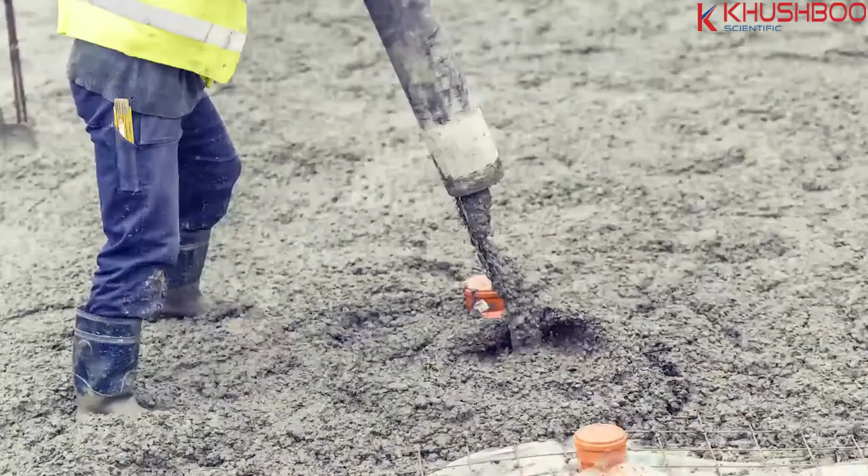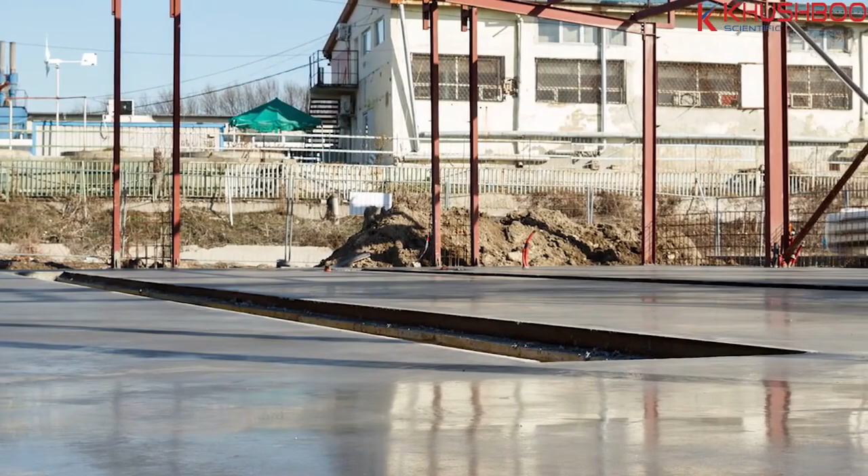When mixing concrete, water must be added to create a workable mix and to allow the cement to hydrate and cure. After hardening, much of this water remains as moisture within the porous concrete slab. Over the following months, this moisture is slowly emitted from the concrete until it eventually equalizes with the surrounding moisture levels. When applying flooring materials or coatings to concrete, it is critical to ensure that the moisture level inside the concrete has decreased to acceptable levels. If not, moisture can accumulate below the flooring or coating, causing discoloration, cupping, buckling, blistering, adhesive failure, and mold growth.

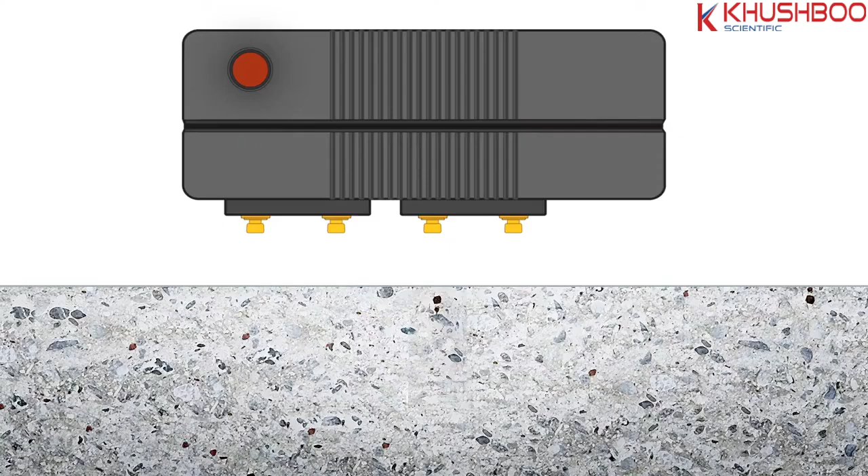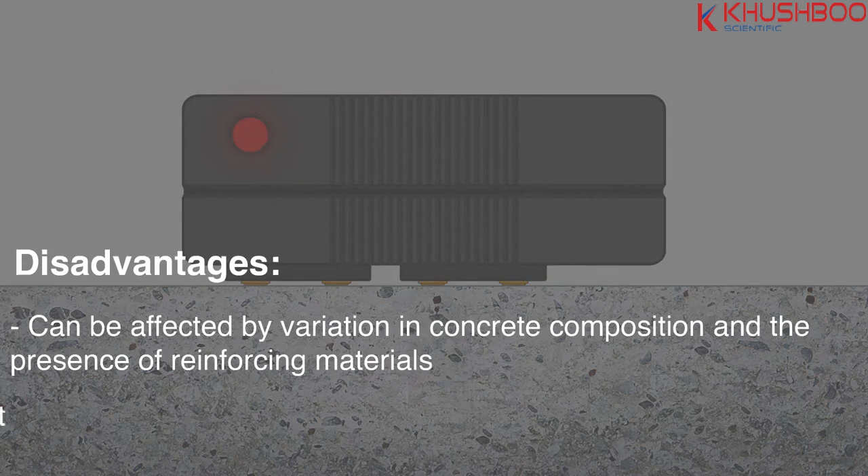There are several methods for measuring concrete moisture. Of these, the three most popular are non-destructive electronic meters, anhydrous calcium chloride, and in situ relative humidity probes. Non-destructive electronic meters measure the electrical impedance of the concrete, which is related to moisture levels. However, these meters can be affected by other factors such as variations in concrete composition and the presence of reinforcing materials. ASTM recommends that these instruments be used as a comparator and not for determining quantitative moisture content.

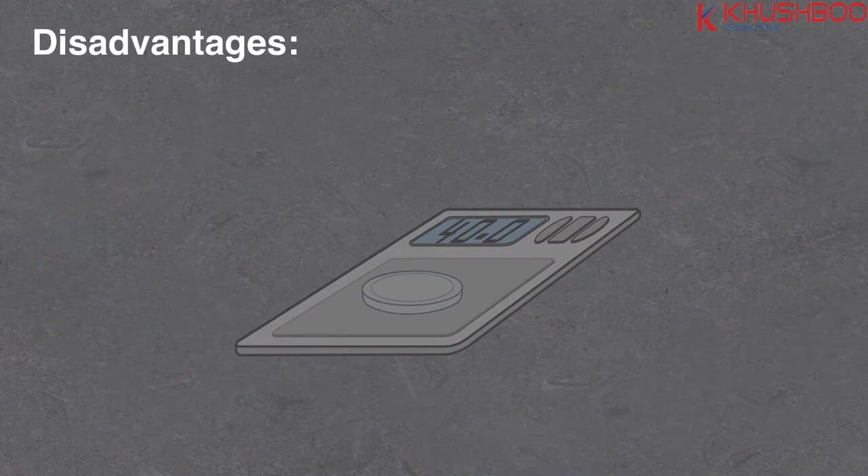The anhydrous calcium chloride test involves measuring the increase in weight of salt as it collects moisture from an encapsulated area of the concrete surface. However, significant doubts concerning the accuracy of this test have arisen. There is no practical way to calibrate these kits. They measure moisture only on the surface of the concrete, and they are heavily influenced by ambient conditions.

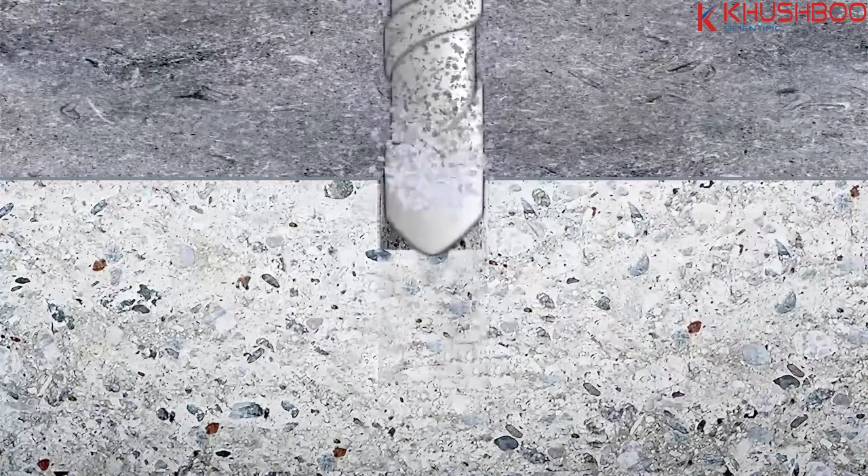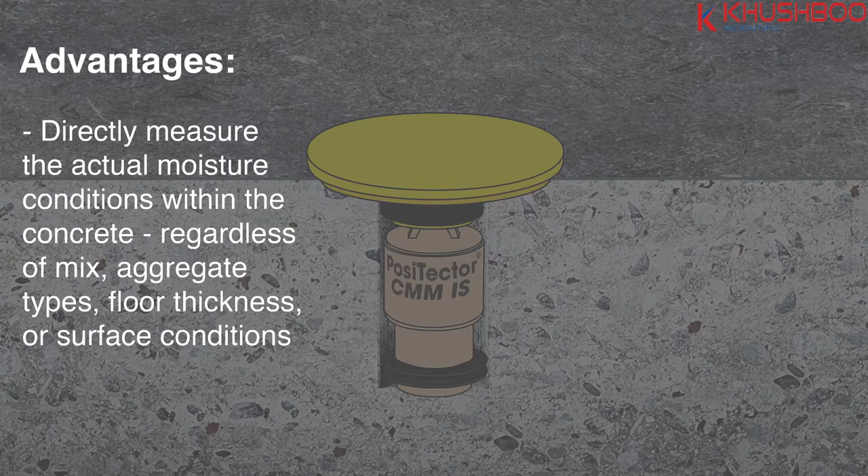The new industry standard for measuring concrete moisture is the in situ relative humidity test, as described in the ASTM F2170 test method. It involves drilling a hole into the concrete and using an electronic relative humidity probe to measure the moisture directly in the slab. The in situ test has a number of advantages over other methods. Most importantly, in situ probes directly measure the actual moisture conditions within the concrete, regardless of mix, aggregate types, floor thickness, or surface conditions. Potential sources of error are minimized compared to other methods. In situ tests also tend to provide a significant savings in testing time and labor versus calcium chloride tests. Finally, in situ probes can be calibrated with traceability to national standards.

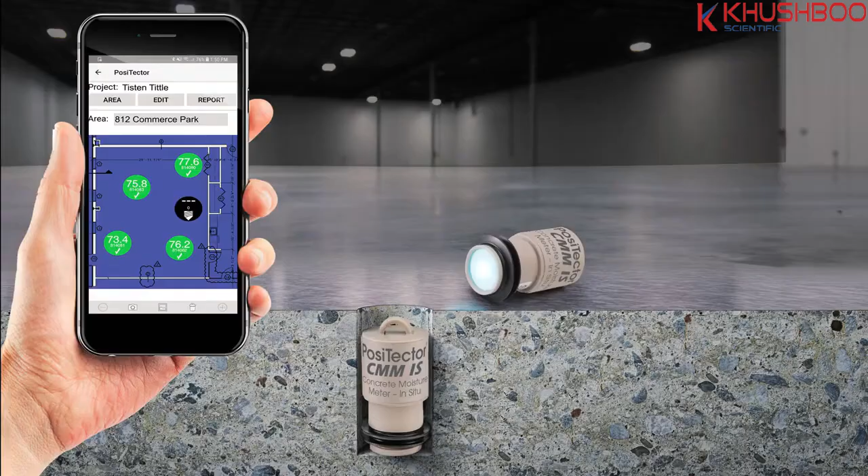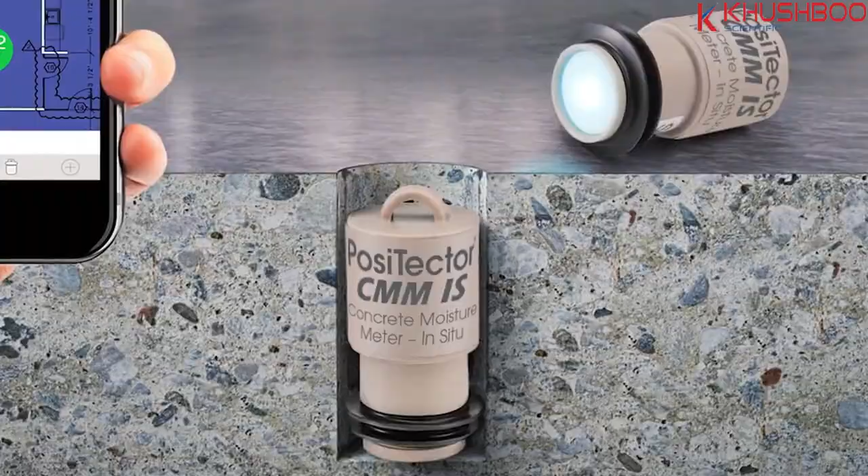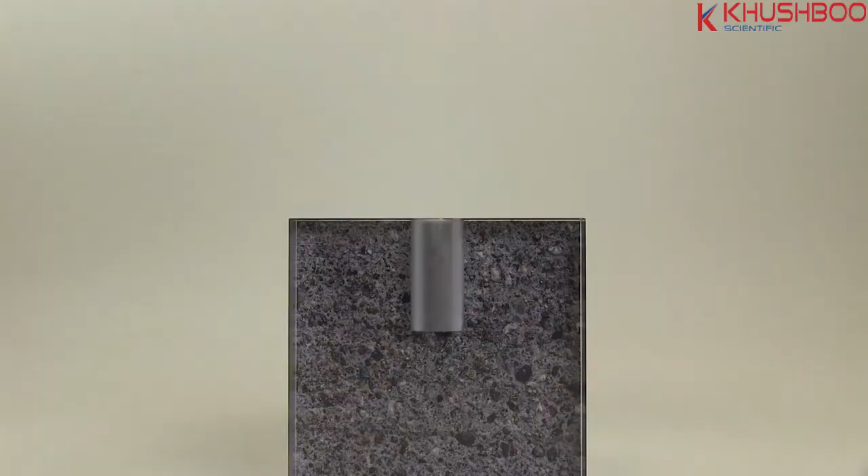The PosiTector CMM-IS in situ concrete moisture meter is the simple, durable, and accurate way to measure in accordance with ASTM F2170. Each probe includes a calibration check salt and chamber for storage, and to verify calibration accuracy before testing. Probes feature Bluetooth low-energy wireless technology to transmit moisture readings to a smartphone or PosiTector advanced gauge body. The probe runs for up to 3 weeks on a single coin cell battery and features an innovative design that doesn't require separate disposable sleeves or bases. A bright yellow cap seals the test area.

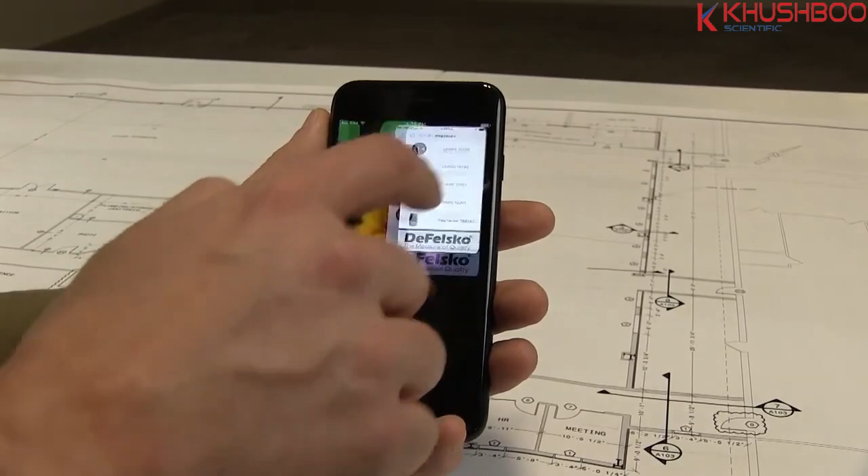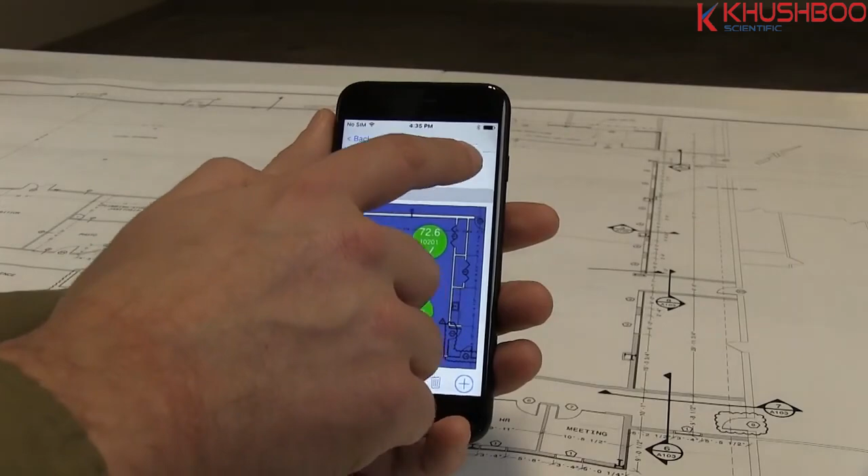The free PosiTector app makes capturing and reporting in accordance with F2170 easy. Using an iOS or Android smartphone, overlay each probe on a floor plan and add metadata and notes as required by ASTM F2170. When testing is complete, quickly print a professional PDF report that includes all data required by the standard. The PosiTector CMM-IS is available in 3 convenient kits.

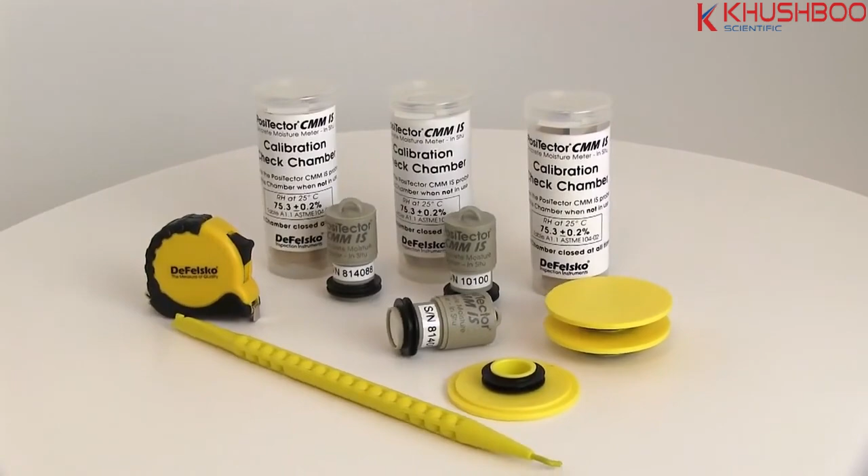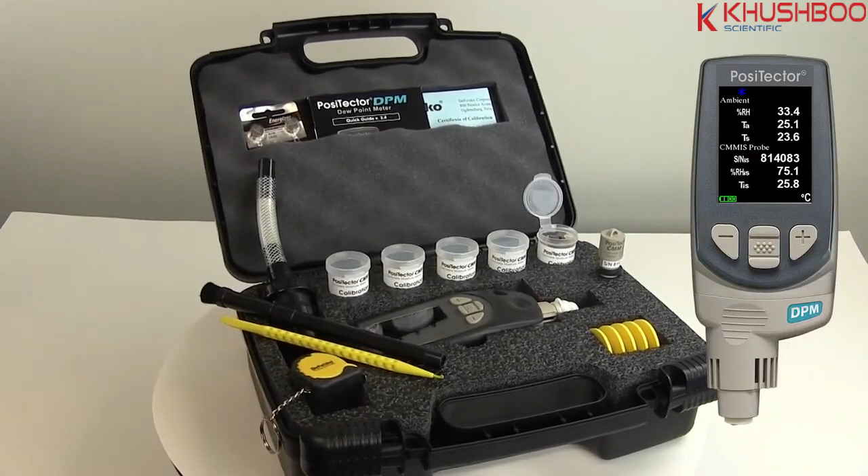The basic kit contains 3 probes, check salts, and a calibration chamber for measuring areas up to 1,000 square feet or 100 square meters. A measuring tape and extraction tool are also included. The complete kit contains everything from the basic kit, in addition to a vacuum tool for cleaning the hole after drilling, a hard shell carrying case, and 2 additional probes for measuring up to 3,000 square feet or 300 square meters. The Pro Kit contains everything from the complete kit, in addition to a PosiTector DPM advanced gauge for measuring ambient temperature and humidity. It can wirelessly receive in situ humidity and temperature measurements, displaying them alongside the ambient measurements.

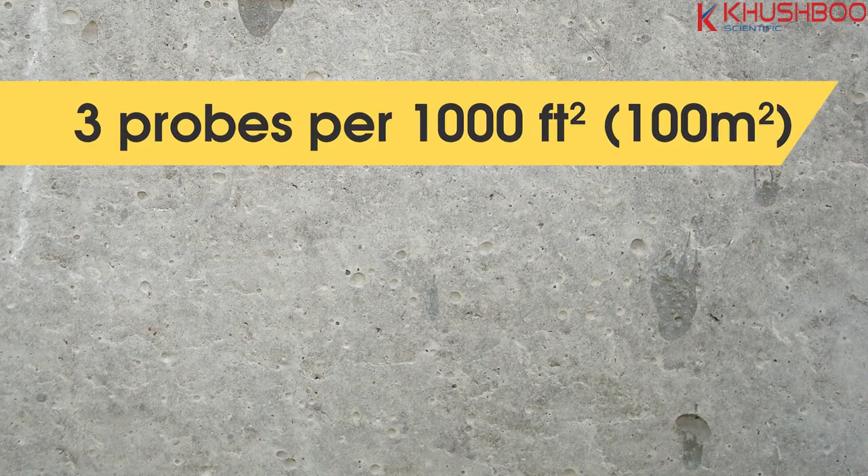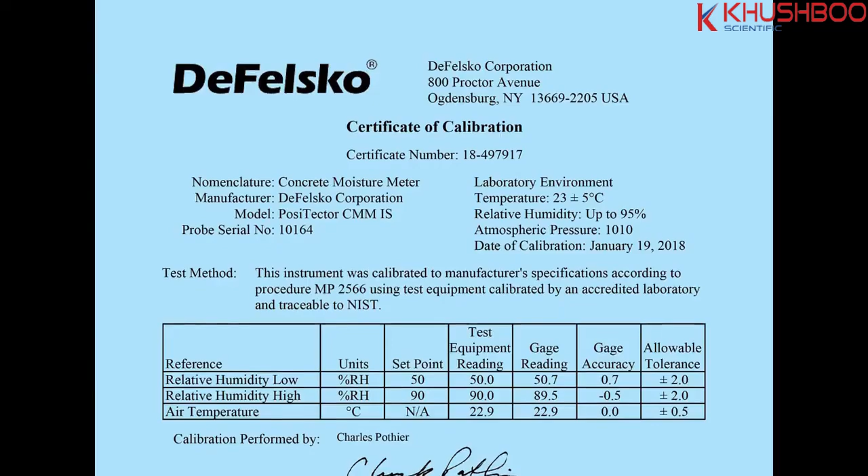The process of measuring concrete moisture in accordance with ASTM F2170 is simple with the PosiTector CMM-IS. The first step is to determine the number of probes required. ASTM requires 3 probes for the first 1,000 square feet and another probe for each additional 1,000 square feet. Mapping locations is easy with the PosiTector app. Take a photo of your floor plan and overlay probe locations. Ensure that the slab and the ambient air above it are at service conditions for a minimum of 48 hours before testing. The next step is to verify probe calibration.

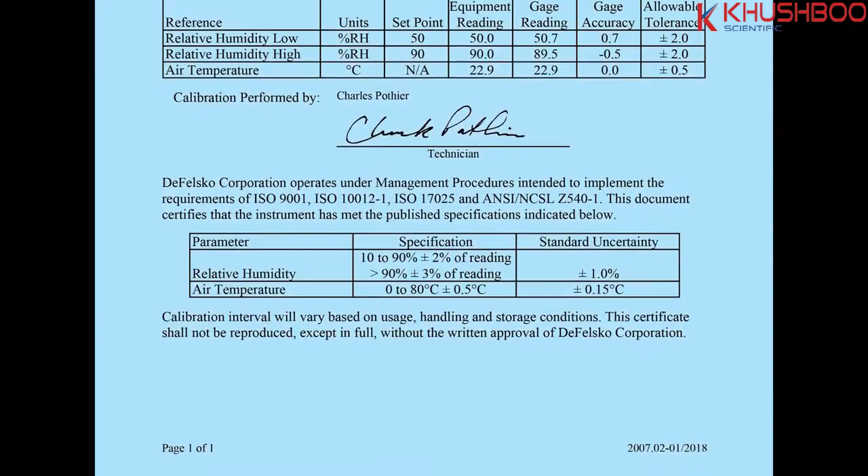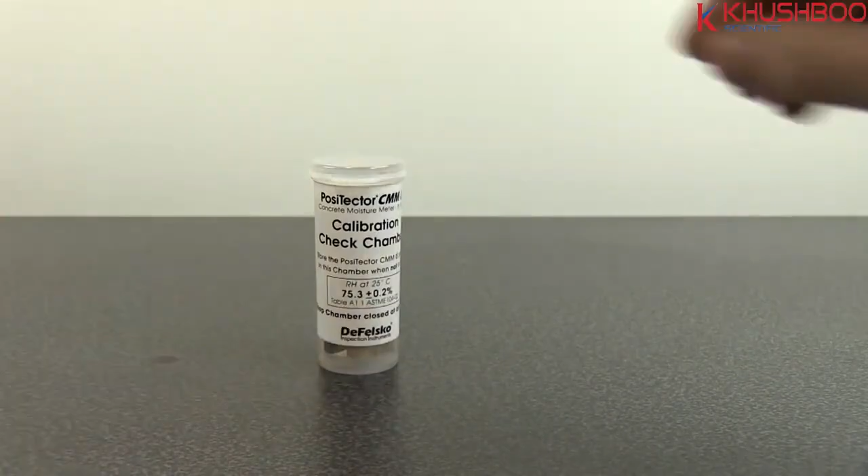PosiTector CMM-IS probes come complete with a long-form certificate of calibration traceable to NIST. F2170 requires that each probe be calibrated within 1 year of use. F2170 also requires calibration to be verified within 30 days of use with a saturated salt solution. Each PosiTector CMM-IS probe comes prepackaged with a saturated salt solution, so verifying calibration is as simple as turning on the probe by unscrewing the cap and inserting a battery, then ensuring that the current probe reading matches the label on the container. Next, drill the test holes.

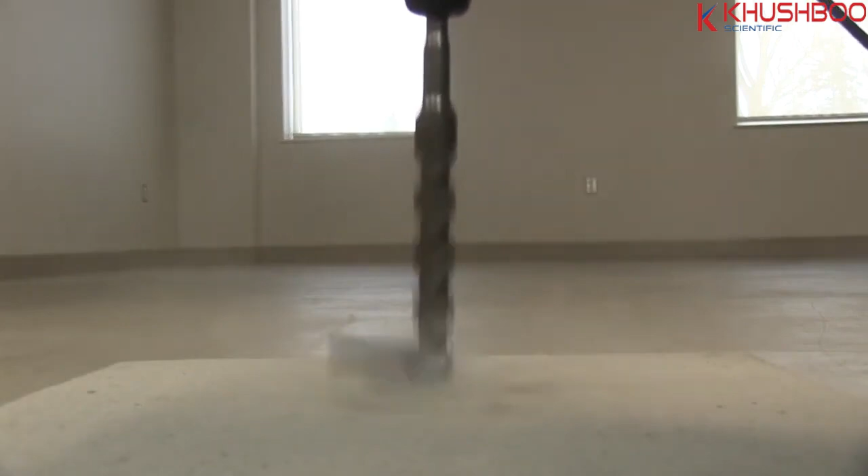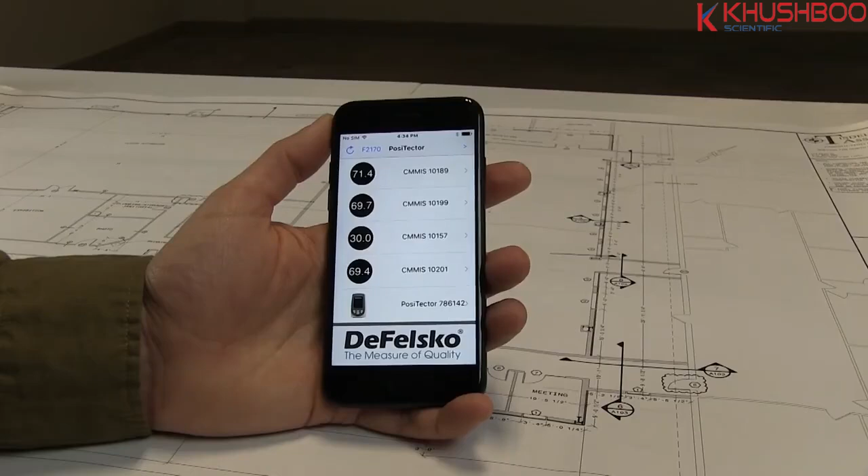Using a hammer drill and 3/4 inch drill bit, drill to the required depth, 40% of the slab thickness if it is drying from one side only, or 20% of the slab thickness if it is drying from two sides. Clean any debris from the hole and note the time the hole was drilled in the app. Finally, insert the probe into the hole and use the yellow cap to seal it. Note the time the probe was inserted using the app. The probe begins measuring immediately and readings can be displayed at any time using the PosiTector app or PosiTector Advanced instrument. However, F2170 requires waiting 24 hours for conditions in the hole to equilibrate before measurements are recorded.

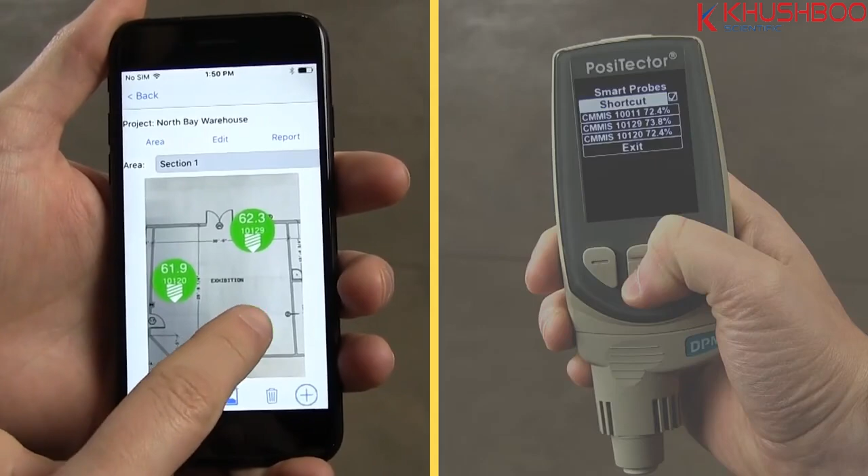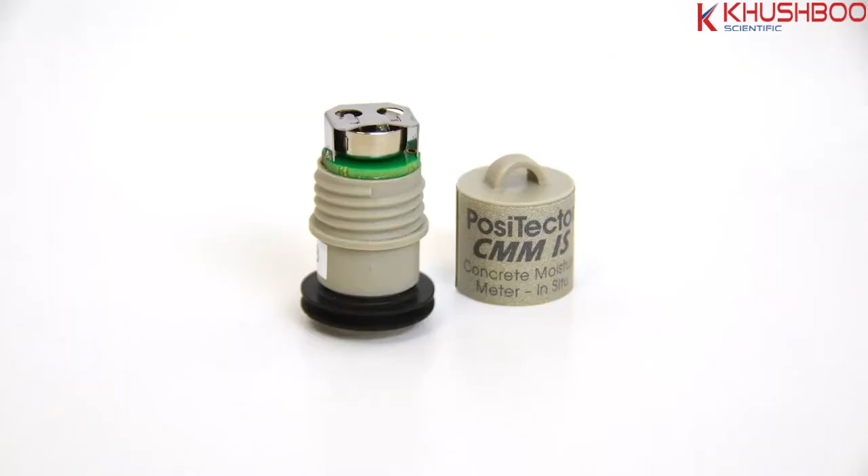After that time has elapsed, use the PosiTector Advanced gauge body or the PosiTector app to easily record the in situ temperature and humidity along with the time and date. If the results are outside of project specifications, the probe can be left inside the hole until the project specification is met. Probe batteries last up to 3 weeks. When testing is complete, simply remove the probe using the extraction tool and fill the hole with a suitable patching compound. ASTM F2170 also requires that the ambient temperature and humidity above the hole be measured. Place a probe above the hole and record conditions using the app.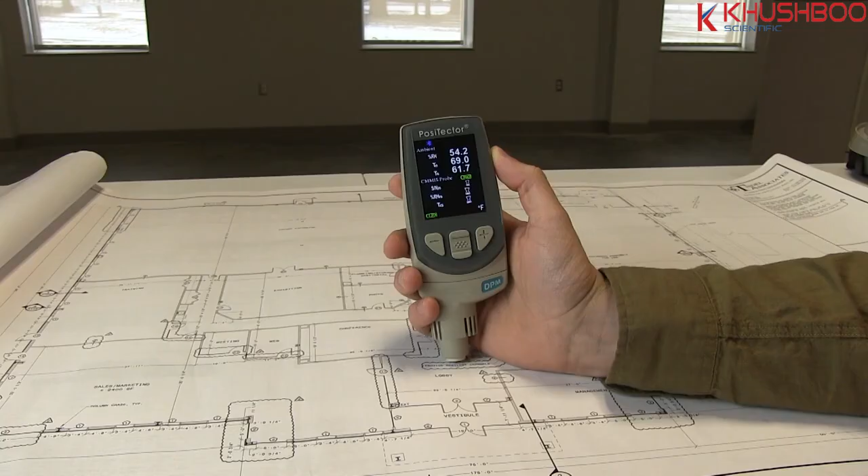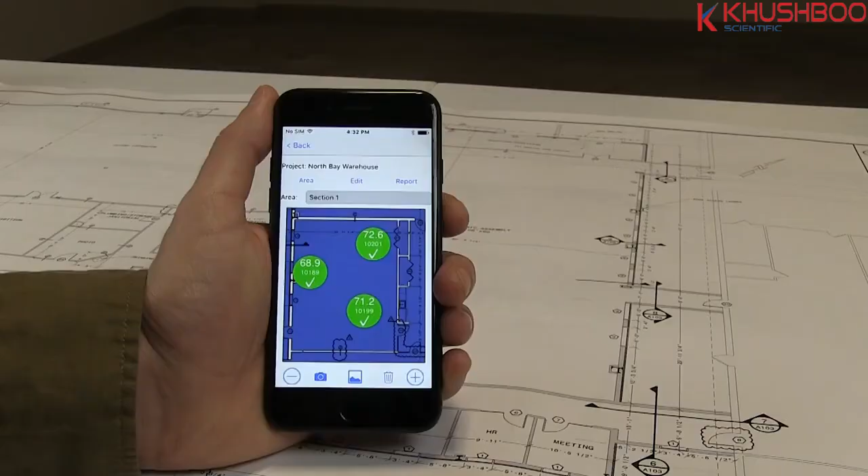The test is now complete and all data required by ASTM F2170 has been collected. Use PosiSoft software to download readings from your PosiTector gauge body or press Report from the PosiTector app to view a PDF inspection report containing all information required by ASTM F2170, which can be emailed or saved.